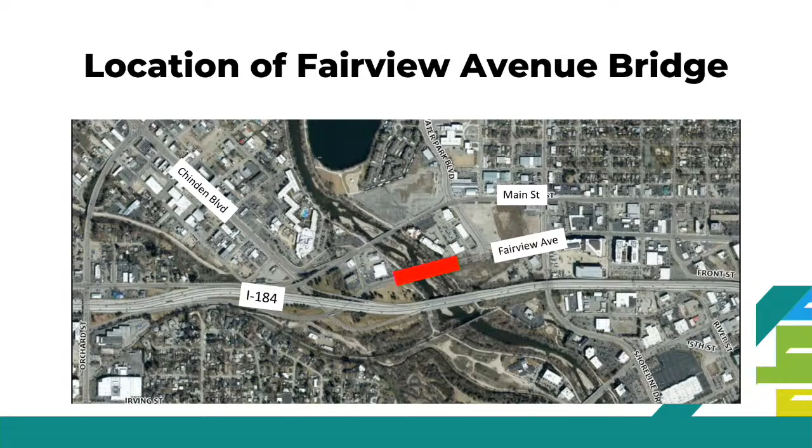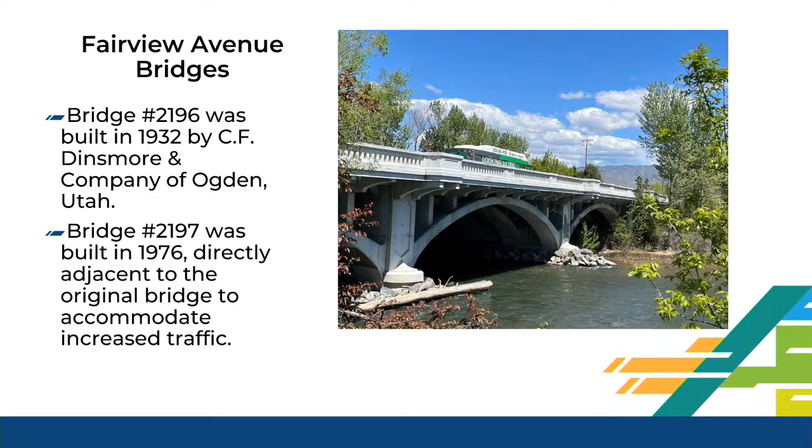The Fairview Avenue bridge over the Boise River is in fact 2 bridges, built many years apart but functioning as a single structure. It's interesting to note that the Fairview Avenue Bridge was built by C.F. Dinsmore and Company, the same company that built the North Fork Payette Bridge, more commonly known as the Rainbow Bridge.

Per the district engineer, there are several reasons why the bridges need to be replaced. The bridge design is susceptible to scouring of the piers and abutments during the Boise River's annual spring runoff. Scouring is the removal or erosion of riverbed sands from around the piers and abutments. Without regular maintenance, scouring can lead to damage to the structure of the bridge.

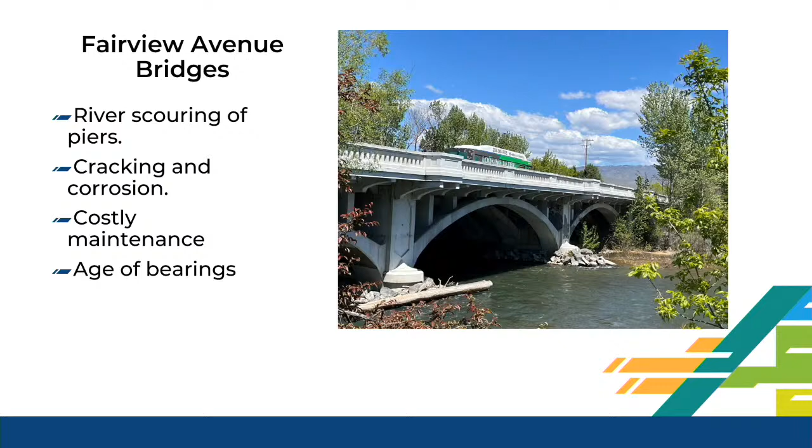Inspections of the 2 adjacent structures have identified cracking and corrosion in several of the bridge elements. Maintenance on the bridge joints between the 2 structures and expansion joints is nearly a continuous process, and the bridge's bearings are corroded and will need to be replaced in the future.

Here's an overhead view. If you look closely, you can see a difference between the top portion and the lower portion. Those are the 2 separate bridges. Herbert Hoover was president when the south portion of this Fairview Avenue Bridge was built, and Gerald Ford was president when the north portion was built.

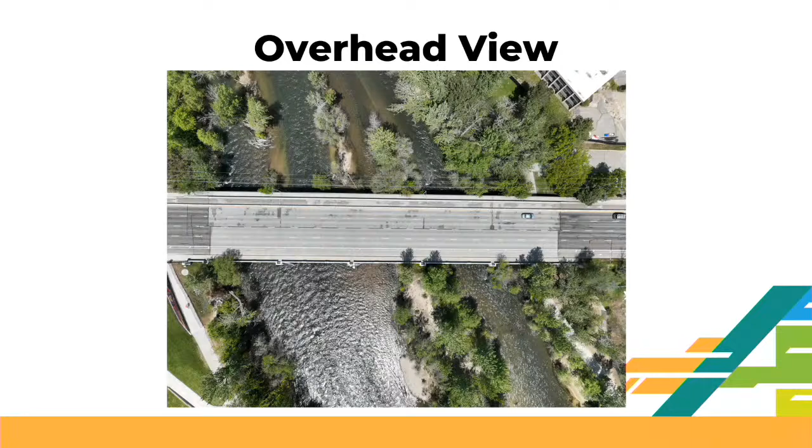Commissioner Goldthorpe remembers both of them. Wasn't that funny, Dave?

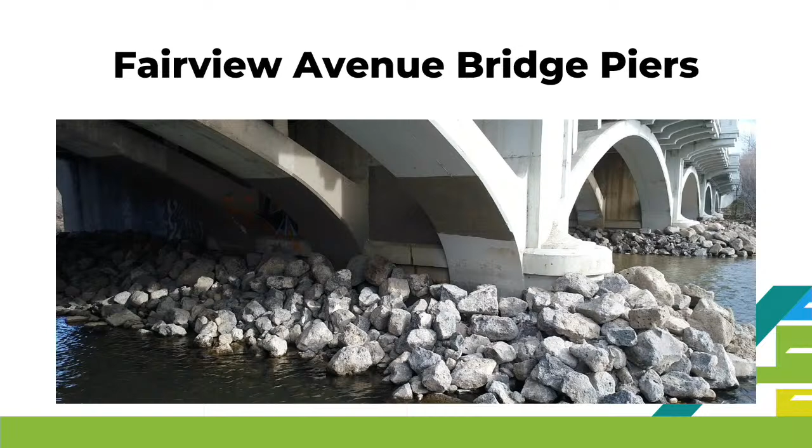As I mentioned, scouring can lead to damage to the structure of the bridge and requires periodic maintenance. Significant scouring occurred from the prolonged 2017 Boise River flood, which required the placement of riprap, which you can see in this picture. This maintenance project was funded at the time with a $139,000 grant received through the state.

This bridge improvement project will evaluate and design a replacement Fairview Avenue bridge with a similar west to east traffic flow and a design that will match the existing street configuration. Bike lane facilities will meet ACHD's level 1 or 2 level of traffic stress per the livable street design metrics. Also, bike and pedestrian facilities will be included with improved access to the Greenbelt.

ACHD's goal is to replace this gateway bridge with an architecturally significant structure that will serve the people of Ada County for the next 100 years. Preparing for a competitive federal grant requires a well-developed design and a record of public support for the project. This design effort will positively position the Fairview Avenue Bridge project for a competitive federal grant, such as a RAISE grant or a Bridge Investment Program grant.

The scale of the Fairview Avenue Bridge project and the significant amount of environmental work required makes federal funding a preferred option. Working with ITD is also necessary to receive the appropriate environmental approval with either local or federal funds. Advanced construction funding language in this project development agreement allows ACHD to seek federal reimbursement for locally funded project development costs.

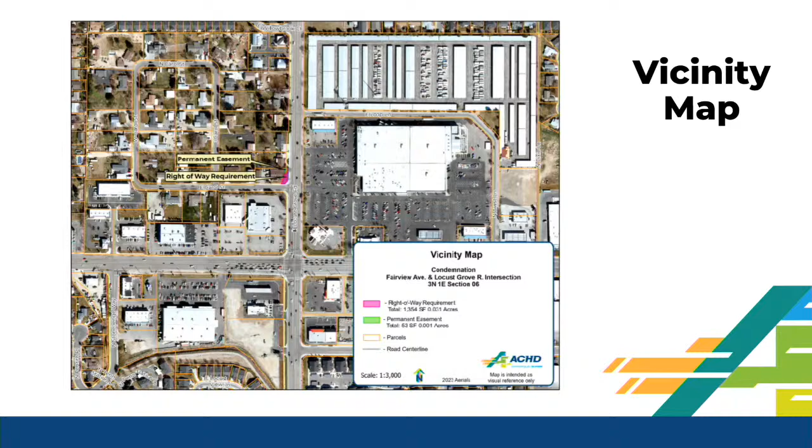Here is a vicinity map of the location. As you can see, we are just north of Fairview here. Over to the right is the Fred Meyer, and just to the south of this property is the Walgreens.

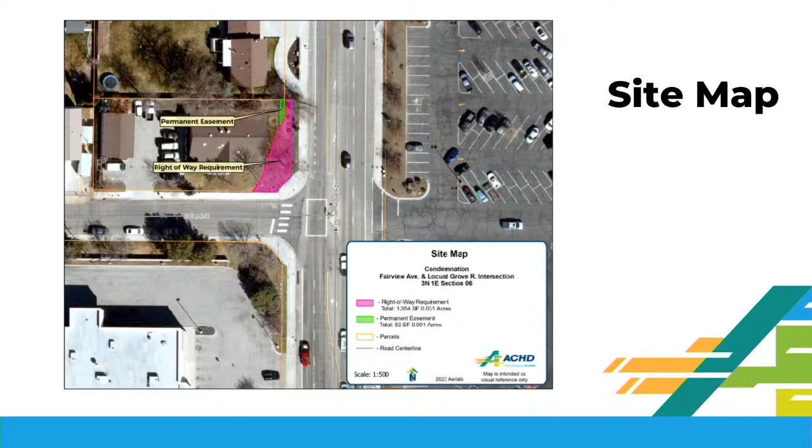The amount of the acquisition is 1,354 square feet, and the permanent easement is 63 square feet. As you can see here, the acquisition is in the purple color, and the permanent easement is in the green.

Property size before the acquisition is 0.350 acres. After the acquisition, the property size is 0.31 acres. It is important to note that the zoning and use here is commercial, limited office zoning.

ACHD has been negotiating with the property owner since February of 2023. ACHD initially attempted contact through mailing and calling. When contact was made, concerns expressed by the property owner dealt with well locations and the potential loss of those wells. ACHD researched the well issues and worked to communicate with the property owner. Since that time, there have been multiple attempts to make contact with the property owner to no avail, to discuss working towards a resolution on the issues.

ACHD staff is asking to move forward with the condemnation so we can keep the budget execution on schedule. It is staff recommendation that we declare the acquisition area necessary for the project as a right-of-way and public use, authorize staff to proceed with the condemnation action, and execute an order of condemnation for the acquisition area. As always, ACHD staff and legal will negotiate with the property owner if we find a willing negotiator that comes back to the table. I will remain standing for any questions.

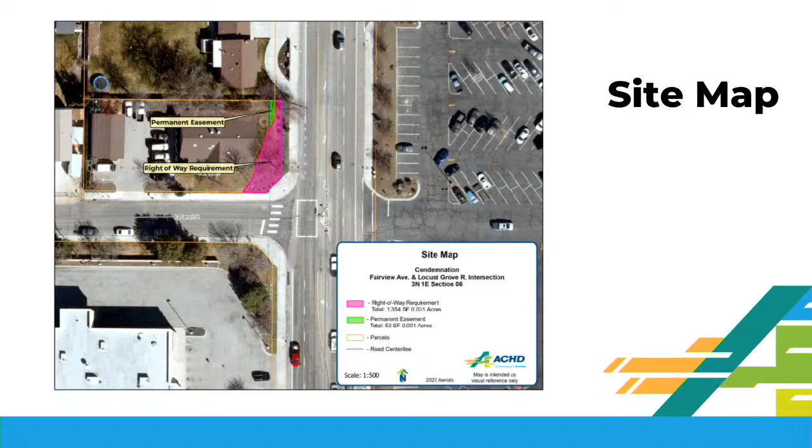Commissioner Coulter: Dave, I'm curious, where are the wells located in this? The well is right about where, if you see where the arrow comes in, where it says right-of-way requirement, it's probably just a couple of feet off of that, kind of towards that corner right there. Interesting place to drill a well. We've seen it a decent amount—there's wells all over the place.

Commissioner McKinney: So Dave, continuing on the well question, just to clarify, there is an existing well and it's restricted for irrigation use only. And the property owner will have the right, even though it's now within the right-of-way, to drill another well outside of the right-of-way to replace that one. Is that what the agreement is? Yes, that is what ACHD staff researched. They will be able to drill a well for irrigation uses, which is what this well is for as it stands now. And is the cost of that contemplated within our negotiations and offered to the property owner?

Yes, we do those types of things—we reimburse the property owner for those types of activities as part of the negotiation.

Steve Price, General Counsel, for the record: As David mentioned, it's fairly typical in some neighborhoods that a lot of people have irrigation wells. They've had them for a long time, just a small domestic well. When we find them in a project, we have to relocate them. It's called a cost of cure. It's part of the severance damages. In those cases, what we typically do is require them to get 3 bids for the relocation of the well, and then we compensate them for that, and they get to make the arrangements to have the new well done. Our staff isn't out there doing well drilling and things like that. So that's how we deal with those situations.

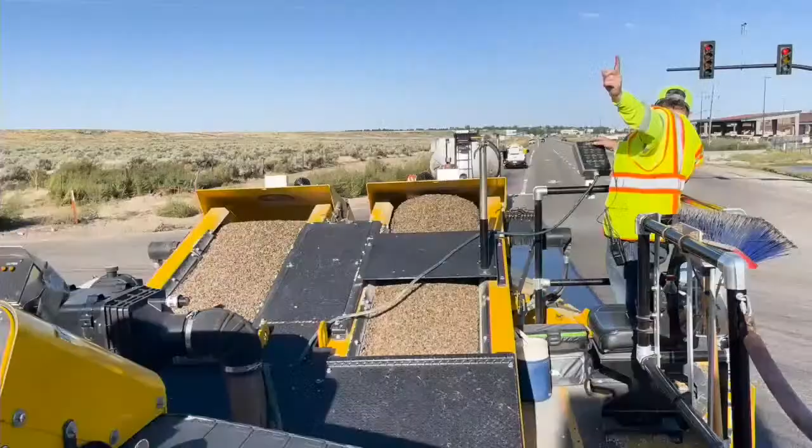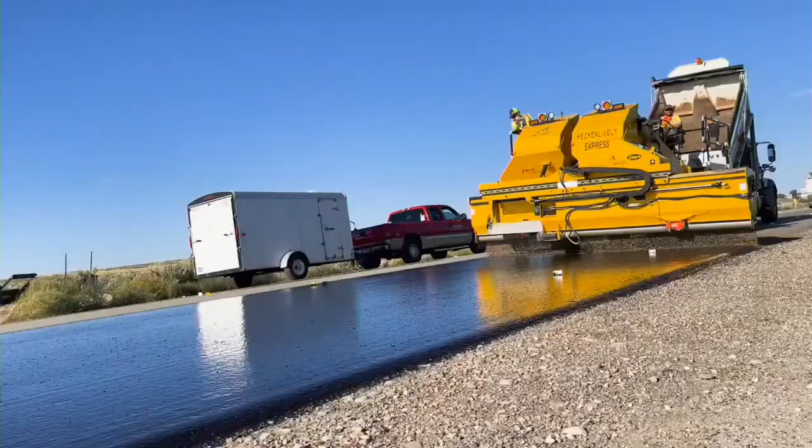Chip seal is a pavement treatment preservation. It serves two purposes: first, it seals the asphalt pavement, and then the chips add a friction course. This allows the pavement to age slower.

This year, we're able to go to two crews. We have the resources to be able to do that. With that, we can cover more lane miles and reach our goal of doing 490 lane miles this year.

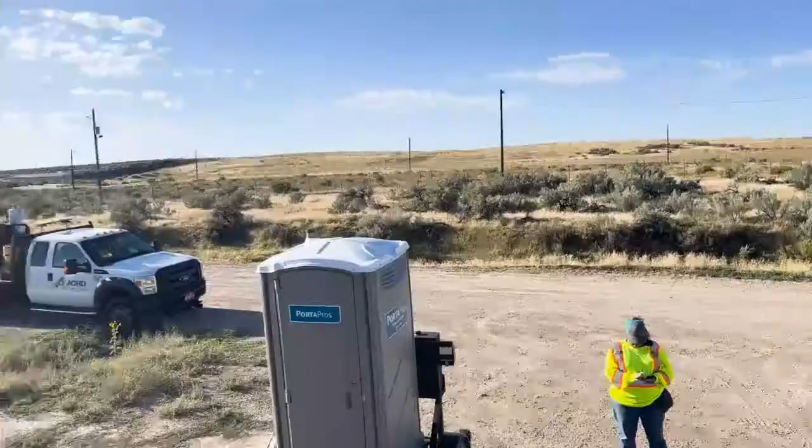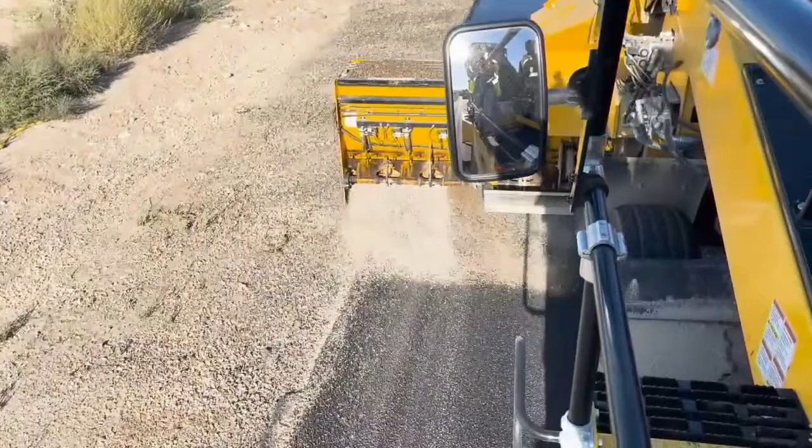For our chip sealing crews, there are a lot of moving parts, dynamic work — we call it our ballet. We have experienced leaders who have done chip seal before and understand all the different moving parts, making sure our trucks are in the right places, our chip spreader is organized, and all distributors know where they need to spray and where to go fill up, so everything keeps moving and flows appropriately. They work well with our flagging contractors to ensure that our crews are safe as well as the traveling public.

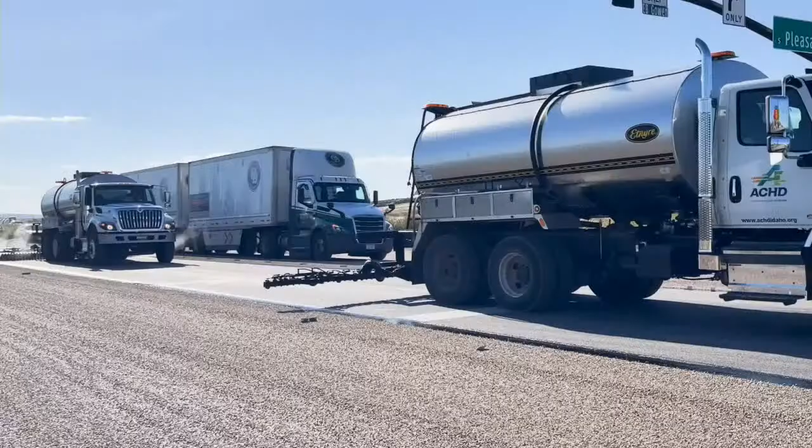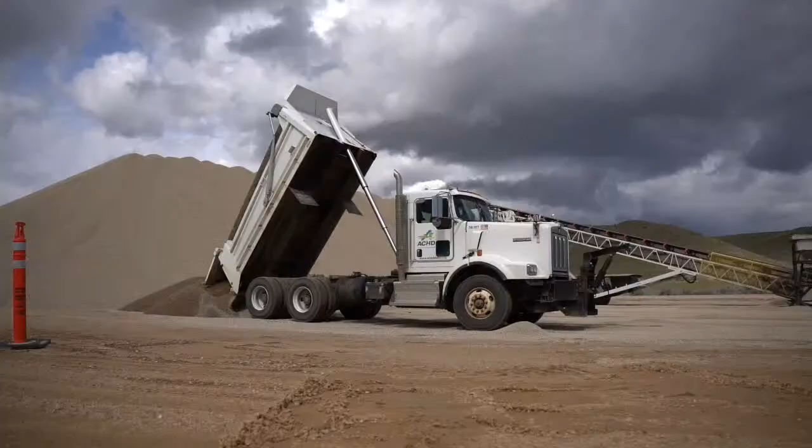So why is it efficient and effective? Here in Idaho, we have plenty of raw materials. One of the biggest benefits is that we can put the chip seal down and open it to traffic within a few minutes sometimes. The traffic actually helps embed the chips into the overall process. Cost-wise, it is very effective and reasonable. Having our in-house crews apply it, and having our own pits where we can mine the chips, makes it extremely cost-effective for this area, and that helps in the pocketbook for residents.

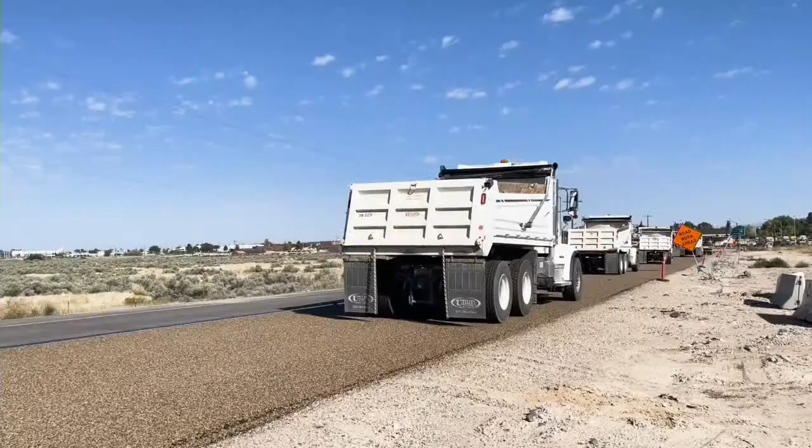Ripping up asphalt and repaving takes years sometimes. This process goes down quickly with minimal impact — traffic is moving again within minutes sometimes of when it goes down. A citizen coming up to our operations, we just ask that they watch the signs and obey the flaggers. They will see a lot of equipment and manpower moving around, so take it slow. This process is a little dusty, but we ask that you pardon our dust as we work through and make sure the roads are maintained. We do this preventative maintenance on the roadway to make them last longer and stay in good condition.

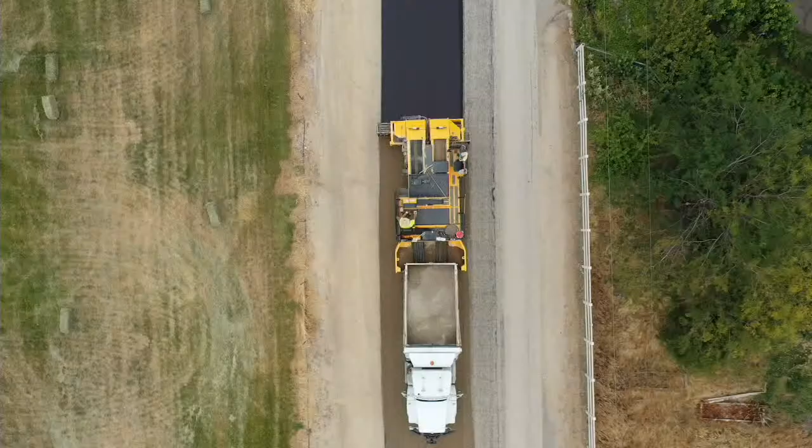An average road could go anywhere from 12 to 15 years and gets to within 12% of its life. There's many different treatment types you can do on that roadway to bring it back up to excellent condition. You can do a full reconstruction, a mill and overlay, or a chip seal.

Our preventative maintenance strategy, which I'd like to highlight, did win this year the 2024 ISSA Excellence in Pavement Preservation Award for our preventive maintenance strategy, where we use chip seal. We're able to do more applications of chip seal at a cheaper rate, and it prolongs the life of that road for longer.

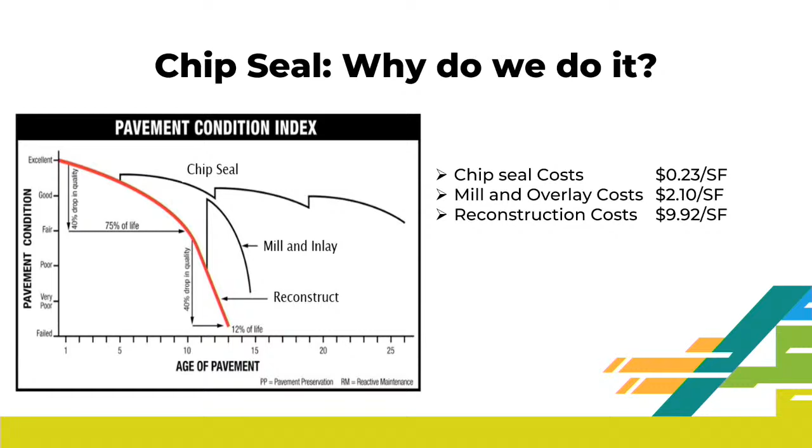Our crews are very experienced and knowledgeable in chip seal, so we are able to do over 400 lane miles in a year, which is more than most any agency within North America.

And 50% of the residentials. So that equates to every 7 years, every arterial and collector roadway will be crack sealed and chip sealed, and every 14 years the residential streets will have a crack seal and a chip seal done to it. That preventive maintenance strategy has led to the great pavement condition index that we have here of very good roads.

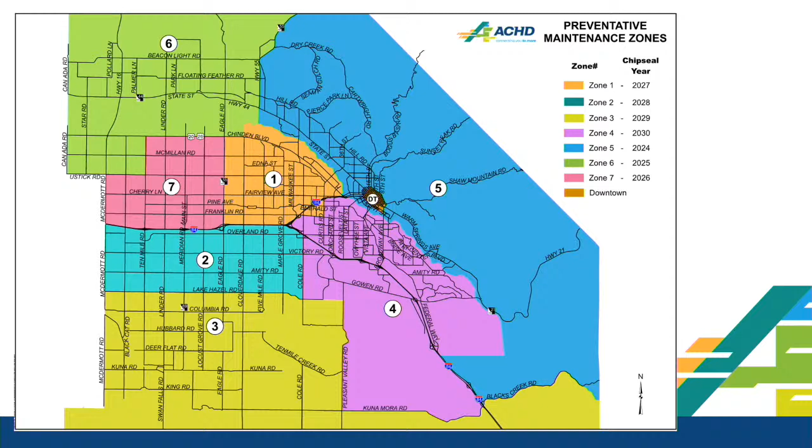So our plan this year, we're excited to say we're going back to 2 chipping crews, and we'll have also 1 fog seal crew. So we're very excited to get out there and start working this year.

We have a soft start date of Tuesday, May 28th, right after the Memorial Day weekend. What the soft start is, we spend the majority of the day in training. We have a lot of new operators, so we're going to take a lot of time to train and explain all the different aspects of chip seal and what their role is.

When we're done the training, they actually go out on site, get the equipment positioned, and we have kind of a soft start, a slow start, so everybody gets comfortable. We also have new contractors on board with us for flagging, so we're also training them on how to keep safe operations for not only our staff, but also for the vehicle public. So that's what the soft start is.

We are prioritizing our arterials and collectors. We're going to get 100% of those done, and 50% of residential streets, focusing on the schools, newly paved roads, and roads not chipped the last cycle 7 years ago.

The reason why we do newly paved roads is studies have shown that within that 2 to 4 year period, if you can get in and chip seal, that seals that road, and it lasts a lot longer than if you wait for the 7 or 8 years.

So quick cost overview, total anticipated cost is $8.5 million. That includes all our labor, equipment, and materials to do the chip seal process. We're anticipating almost 50,000 team hours that go into this, a lot of manpower, a lot of work. We have an amazing team that puts a lot of effort into it this summer.

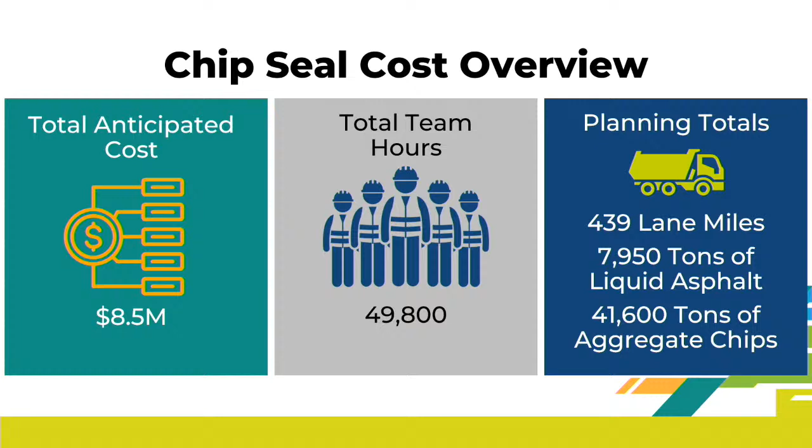To quickly describe the process of chip seal, the first and foremost is our broom crew that goes out. For every lane mile our chipping crew chips, our sweepers are generally doing 3 passes. They have to go out with the initial sweep. It's very important that we get all that dust and debris off the roadway, because if it's not removed, when the emulsion goes down, it doesn't adhere properly and you can have the potential of peeling. It's crucial that our broom crew goes out initially and gets all the debris off. They do a great job.

Once it's been chipped, they also come back after about 4 to 5 days, and any chip that has not been embedded in the emulsion, they sweep that excess chip off. Then they also come back after fogging and resweep it before going into any painting of lines. So they touch every road 3 times, but they're very crucial to our operation.

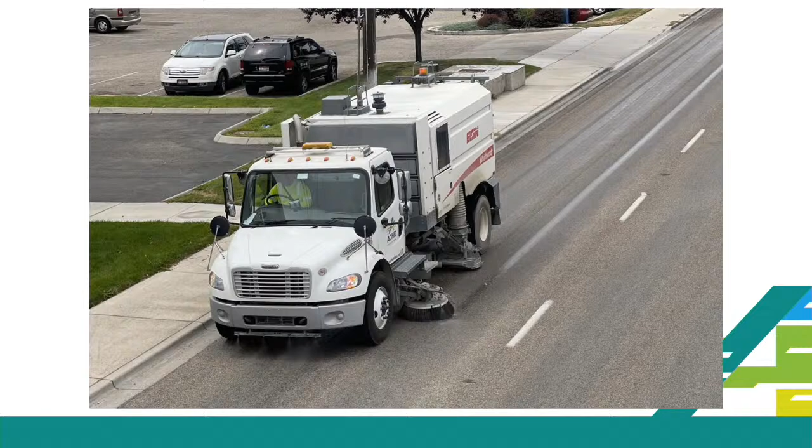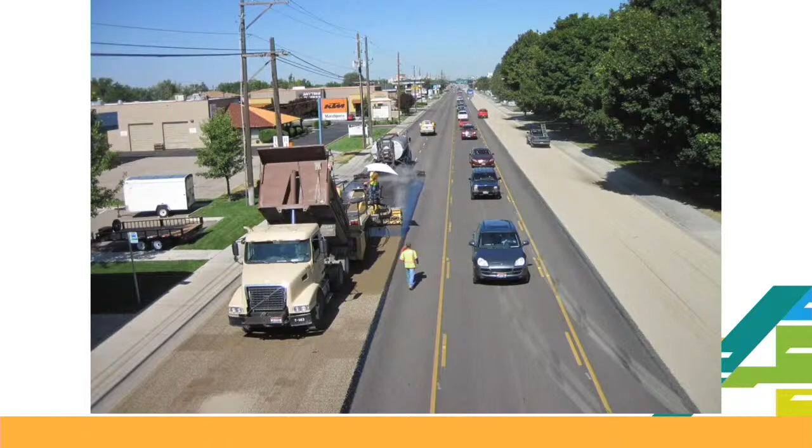Because this is a very fast, mobile, moving operation, we can take that flow against traffic, and it's the most efficient manner. As you can tell, we have that lead truck, which is usually our crew chief or lead worker, setting the pace for the operation.

Then we have our distributor truck that dispenses the emulsion at a set rate. Right behind that is our chip spreader, and they've looked at the emulsion as it goes down, they know when it's going to break, and that's generally where the chip spreader is starting, laying the chip. Then we have all our trucks that feed that chipper box as they go. It's impressive to watch our drivers, the skill they have to be able to back into that chipper box, going backwards and hooking up on the fly. It's just a great operation.

After it's been chipped and they've swept up all the excess, we have our fogging crew that comes in. The fogging serves 2 purposes. The first and foremost is it seals in the chips, lessening the amount of loose chips coming off in the years to come. Plus, it adds an additional seal to the roadway, so the elements don't go through.

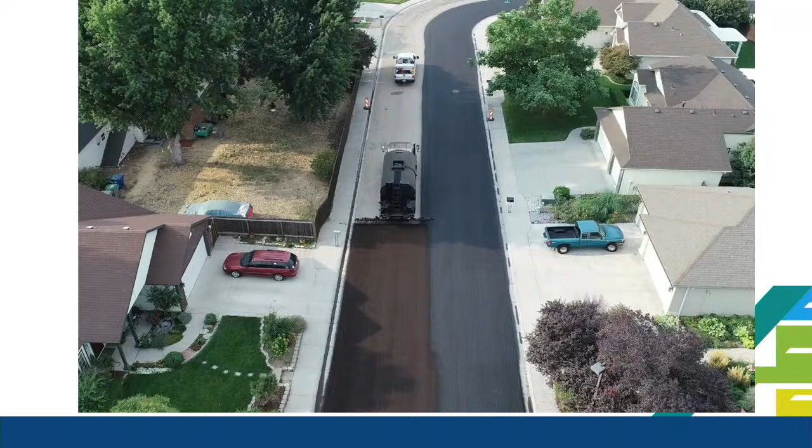Plus, it also adds a new canvas for those roads that need line painting. We've also taken advantage of this fog seal and the new canvas to be able to add turn lanes or bike lanes or other aspects that make it more usable and friendly for all types of users.

Once it's been fog sealed, we then have the paint crew come down and put new pavement markings on, and they do a very impressive job doing that operation.

So preparation for chip seal doesn't just start in May. We're already talking and making preparation in the dead of winter. So when we had that wonderful snow in January, we were already talking about how are we going to chip seal this year. We have our coordination meetings with all our team members as well as other departments. We also talk with ITD and our traffic control, and we go through kind of how are we going to do it this year.

We also meet with HOAs and affected neighborhood associations. So we met with Hidden Springs, they have a few special events going on that we had to coordinate with them about how we were going to chip seal and where, so they know where they could park vehicles. We also met with the North End Neighborhood Association, as the big impact will be that North End.

We had another major coordination meeting on May 2nd, where again we met with our traffic folks, our maintenance folks, ITD, and our different contractors. New this year, we have 2 flagging contractors with us, Specialty and Bighorn. It's going to be a great coordination so that it's not all on one company to get us as many flaggers as they can to help keep us safe.

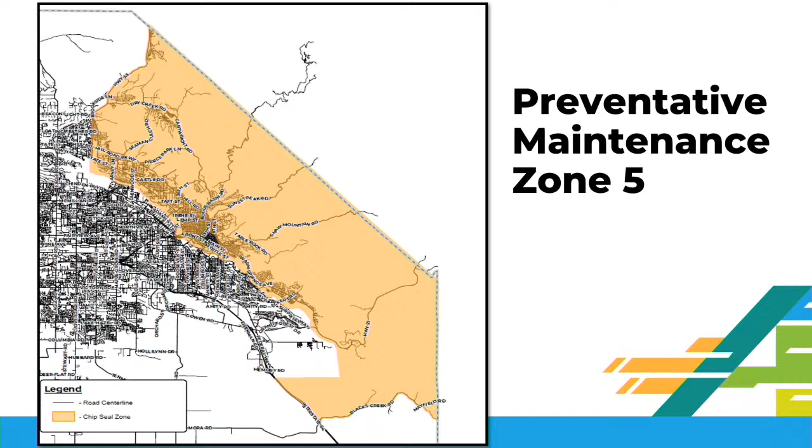We would like to also invite anyone that would love to come in and do a ride along with our crews. It's a great perspective, and you get to see what their view is as they're doing the chip seal. Plus, they just really appreciate when elected officials come out and spend the day with them. They get to ask questions, and it's just a great time by everybody. So I highly encourage and would love to have you guys come out, and we can organize that for you.

And with that, I'll stand for any questions.

Commissioner Hansen: Lloyd, this is great. As you know, last year it was tough not to stand up two crews, so there's this little anticipation of all the local roads, instead of 50%, all of the local roads weren't addressed. I guess it's a little too late to figure out how do we get some of the ones that really need it before seven years. We're just gonna let them all go until seven years from now for that, but is there no overlap to catch some of the worst local roads that we weren't able to do last year?

President Gold: Commissioner Hanson, that's a good question. There's definitely going to be a strategy with our pavement management group, as conditions of roads may deteriorate, where we might have to do a different kind of strategy. I do know that they're looking at slurry seal. And when we finish a zone and chip sealing, they might come in and do some roads that really need it with a slurry seal. We're also looking at, once we have the U-stick fully staffed, we can have that third chip seal crew that might aid in doing certain areas. But currently, yes, we will just follow the same program, and when we get back into that zone, those roads that we did miss will get caught at that time.

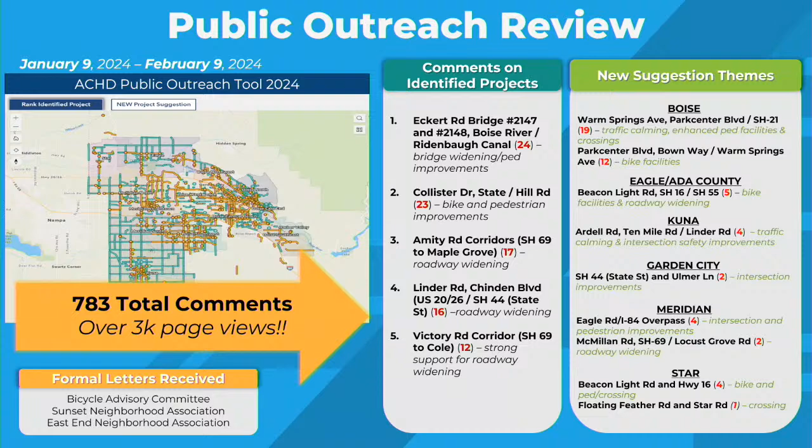I would also like to add that we have received formal letters from the Bicycle Advisory Committee, Sunset Neighborhood Association, and the East End Neighborhood Association. All of these letters and the full list of public comments have been provided to you and are attached to the staff report on our website for public viewing.

Next, we will go over what we heard from our partners. As a reminder, kickoff letters were sent out on December 13th to all cities: Boise, Eagle, Garden City, Kuna, Meridian, and Star, the 3 school districts, Boise School District, West Ada, and Kuna School District, Ada County, Boise State University, and Valley Regional Transit. Staff held a partner agency kickoff meeting on January 9th to provide an overview of the prioritization process, give details on list submission and project placement, address any questions or concerns, and discuss our new public outreach platform. From January 9th to March 15th, ACHD staff remained available to our partner agencies by providing one-on-one meetings upon request, answering questions via phone or email, and reviewing draft submissions.

I'd like to note that we've received prioritization lists from all of our partner agencies. So in the next coming slides, I will highlight the top requests from each of our partner agencies. We've grouped these in alphabetical order.

Starting with Ada County, their prioritization list included 51 total projects. Coming out on top for roads and intersections was the Eckert Road Bridge project. This project is currently under concept phase, moving into 2025. For community programs, their number 1 is Kent Street, Chinden to Alworth. This project is part of our Access to Opportunity bundle, currently under design.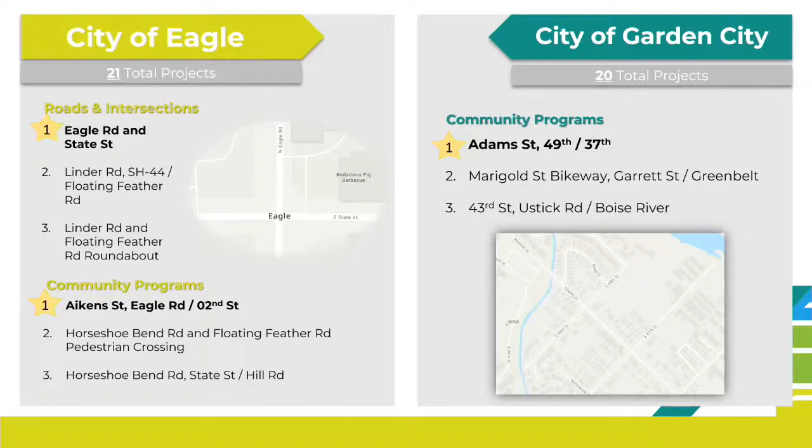Garden City submitted 20 total projects, highlighting Adams 49th to 37th as their top priority, which is currently programmed to begin a concept phase, also in 2025.

City of Kuna submitted 43 projects on their priority list. Both the City of Kuna and Kuna School District have the intersection of Avalon and Kay as their top priority. We are actively engaged with the city on the development of those projects.

Kuna School District submitted 39 projects total. Their number 1 community programs project is Porter Street in Cambridge. This project is currently programmed to begin design in 2027.

So we received 112 total projects this year from the City of Meridian, their top road and intersection project being Linder Overland to Franklin. And the top community programs project being Stoddard, Victory to Overland, and this project has been designed.

City of Star sent us 33 project requests, with Star Chinden to State Highway 44 as their only road and intersection request, and Pollard Lane, Floating Feather to Star Middle School at the top for community programs.

And lastly, Valley Regional Transit sent over 31 total projects, highlighting State Street, Collister to 36th for their road and intersection project, and Maple Grove Edna pedestrian crossing for community programs.